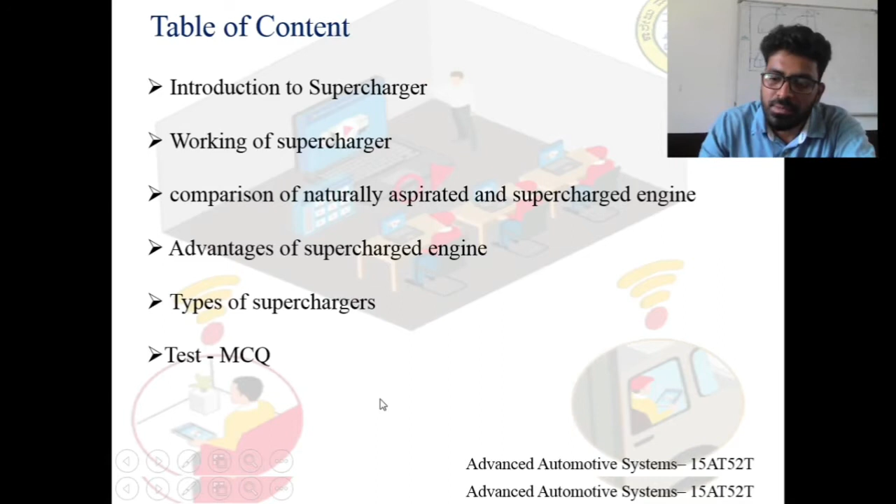Introduction: what is a supercharger? It means the external device that compresses and pumps the air from the atmosphere to the automotive engine. It is called a supercharger. We may call it a compressor or a supercharger. It will suck the air from the atmosphere, compress and pressurize the air, and send it to the inlet manifold of the engine. So it is called a supercharger.

And how is it different from naturally aspirated engines? Naturally aspirated engines means, as I already told, the engine piston during the intake stroke has to suck the air from the atmosphere. During the intake stroke, vacuum is created in the inlet manifold and the engine needs some power to suck the air from the atmosphere. So some power will be lost during sucking the air from the atmosphere. So it is called naturally aspirated engines.

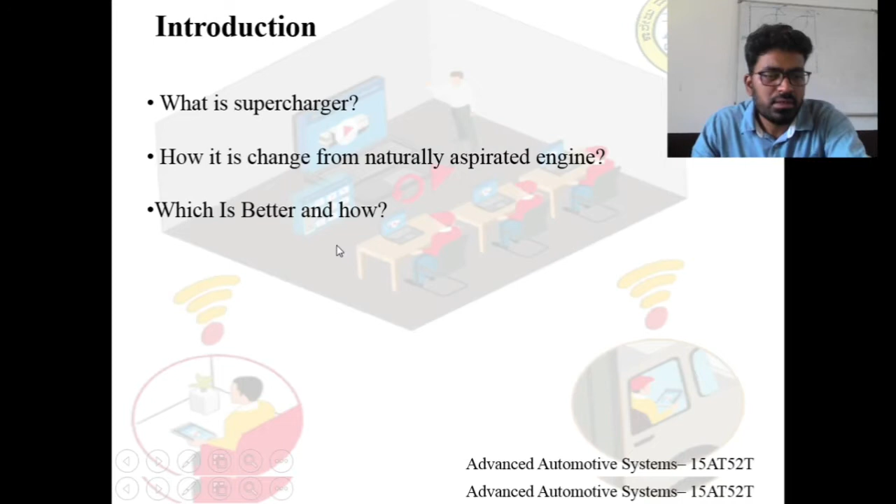Supercharged engine means the air is sucked, compressed, pressurized and sent to the inlet manifold by an external source, meaning an external compressor or device. That device is called a supercharger. And which is better, naturally aspirated engines or supercharged engines? Supercharged engines are better, and how, we are going to learn in this session. So next, working of superchargers.

Here you can see the block diagram of the supercharged engine. The engine has the exhaust manifold here and the inlet manifold, which is shown in blue color. The inlet manifold is connected to the compressor, which we call the supercharger. The compressor or supercharger will suck fresh air from the atmosphere, then compress and pressurize it and send it to the inlet manifold. So the inlet manifold will not be filled with vacuum; it is filled with pressurized fresh air, so during the intake stroke the engine has no work to suck the air from the atmosphere, because the pressurized air is in the inlet manifold.

So for the piston, there will be no work to suck the air from the atmosphere. So power loss during the suction stroke will be reduced. Now the compressor will suck the air from the atmosphere, compress it and send it to the inlet manifold. This compressor is driven by the engine crankshaft. The engine crankshaft gives the power to run the compressor so that it can suck the air from the atmosphere, compress and pressurize it to the inlet manifold.

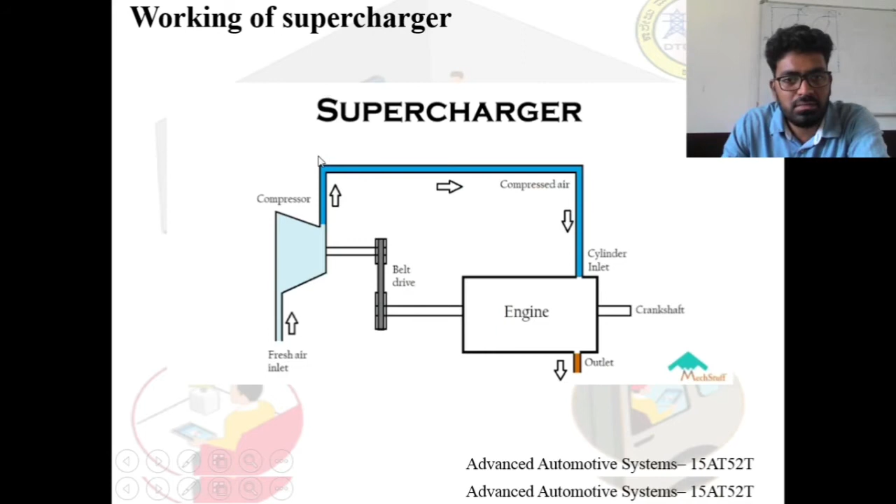So one drawback of the supercharger is that the power for the compressor is taken from the engine. The engine has to lose some power to compress the air. This is one drawback of supercharged engines. Moreover, there are more advantages as the pressurized air comes from the inlet manifold. The engine will have more volumetric efficiency and more power output, so when compared to naturally aspirated engines, supercharged engines are better.

Before the air comes to the compressor, it will pass through the air filter, and the fresh and clean air will go to the supercharger. The supercharger's work is to compress and pressurize the fresh air and send it to the inlet manifold. So the engine will have more volumetric efficiency, meaning the pressurized air will enter into the combustion chamber.

So volumetric efficiency means: suppose a single engine cylinder has 100 cc of space. The compressor can fill about 150 or 160 cc of air into the 100 cc combustion chamber. So the volumetric efficiency will be more, about 150% or 160%. 150% volumetric efficiency can be obtained by this supercharged engine.

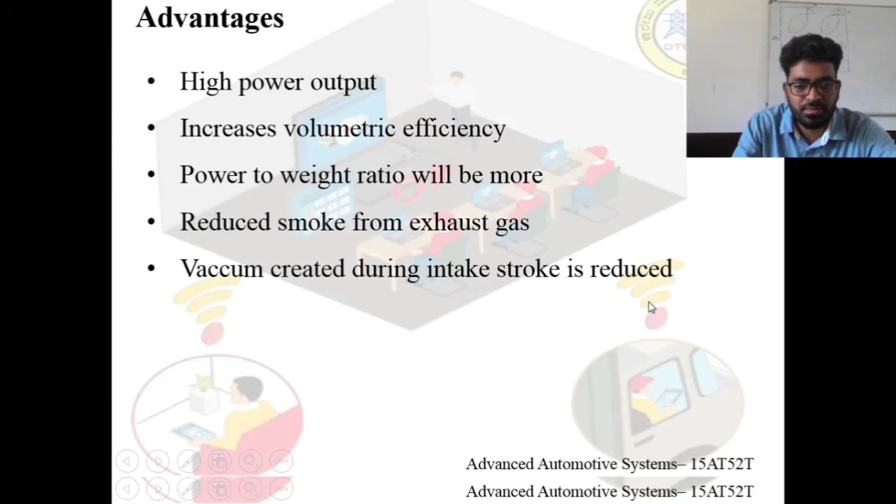Next, types of superchargers, based on positive displacement pump and dynamic compressor. Positive displacement pumps are root blower type and sliding vane type, and dynamic compressors are centrifugal type pump and multiaxial type pump. Some other types also exist, but this is enough for your syllabus.

The main difference between displacement pumps and dynamic compressors: positive displacement pumps provide a constant pressure that will pump the air or fluid to a constant level. At any speed, it will maintain some constant pressure. Whereas in dynamic compressors, like a centrifugal pump or multiaxial type pump, at low speeds they will not maintain constant pressure.

At high speed it may compress and pressurize the air or fluid, but at low speed, the dynamic compressors may fail to compress the fluid. So the main difference is that the positive displacement pump will maintain a constant pressure at any speed, even at low speed. But in dynamic compressors, at low speed they may not compress the fluid. That is the main difference.

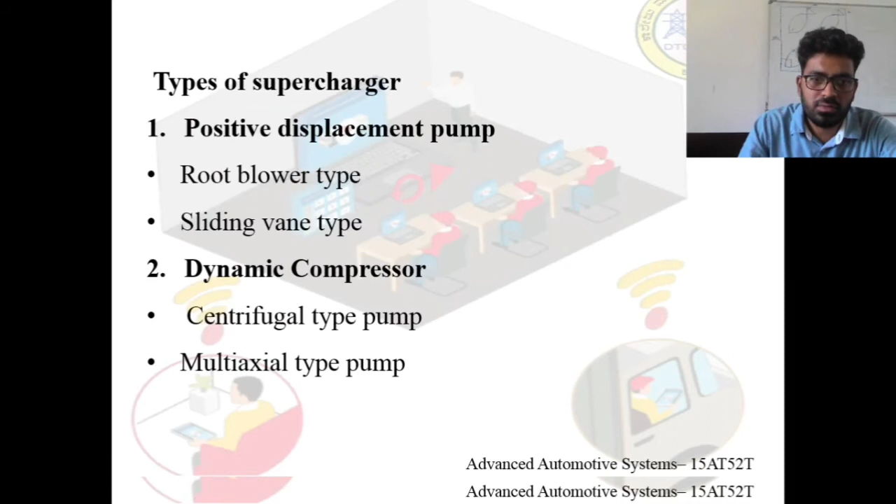Root blower type and sliding vane type are positive displacement pumps. They are nothing but superchargers - root blower type superchargers or sliding vane type superchargers. A supercharger is nothing but a compressor. You can see it here - this may be a root blower type, a sliding vane type, a centrifugal type, or a multiaxial type. Now let's see one by one.

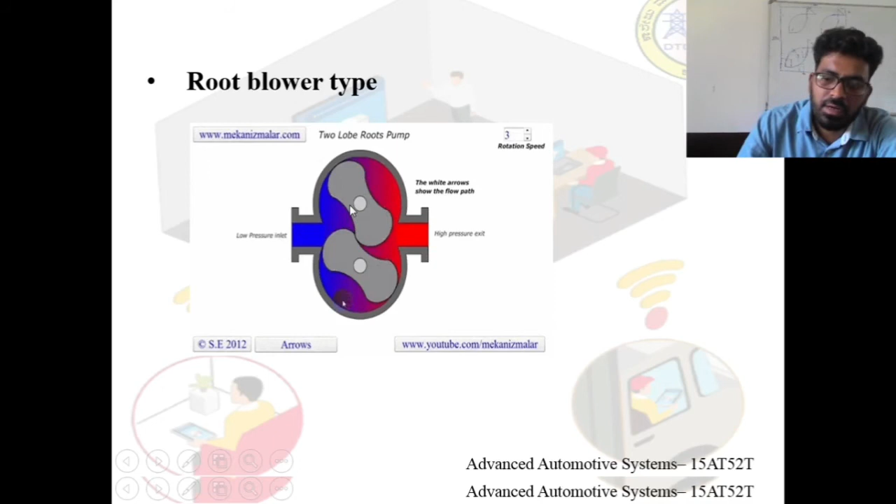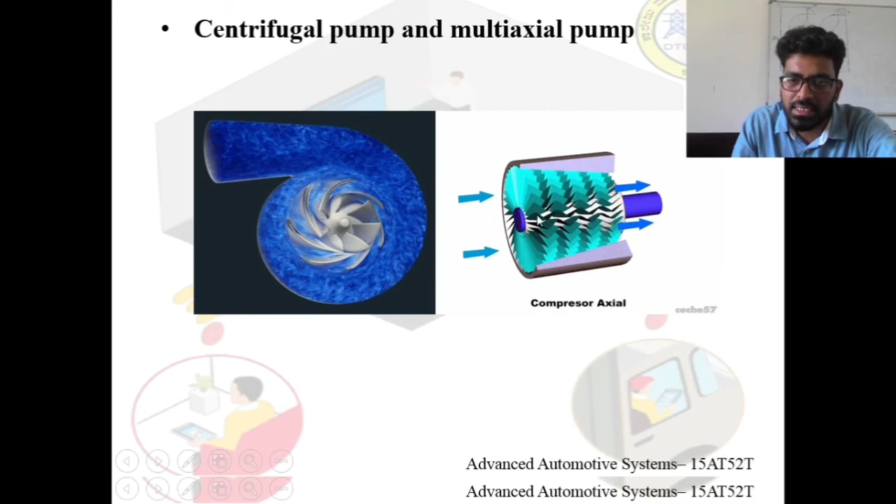Finally, some simple multiple choice questions. Firstly: by using superchargers, we can increase volumetric efficiency — true or false? Yes, this is the main thing about superchargers; we can increase the volumetric efficiency of the engine. So the answer is true.

Next: can superchargers be used for only gasoline engines, only diesel engines, or both? Gasoline engine simply means petrol engine, and we know we can use superchargers for both gasoline and diesel engines. Nowadays diesel engines are provided with turbochargers instead of superchargers, because turbochargers have more advantages — as I mentioned, they don't take power from the engine; the waste exhaust gas force is used to compress the fresh air.

So nowadays turbochargers are mostly provided in diesel engines, but the answer to this question is both — we can use superchargers for both gasoline and diesel engines. So the answer is C. But nowadays they are using turbochargers for diesel engines.

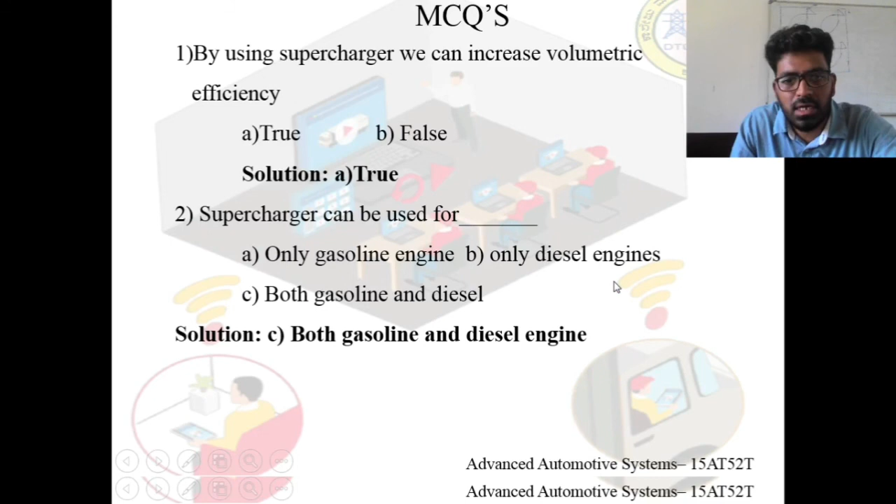Supercharger pumps use engine power to compress the air — true or false? Yes, obviously engine power is taken to run the superchargers. True. In supercharged engines, the compressor is mounted between the air filter and what?

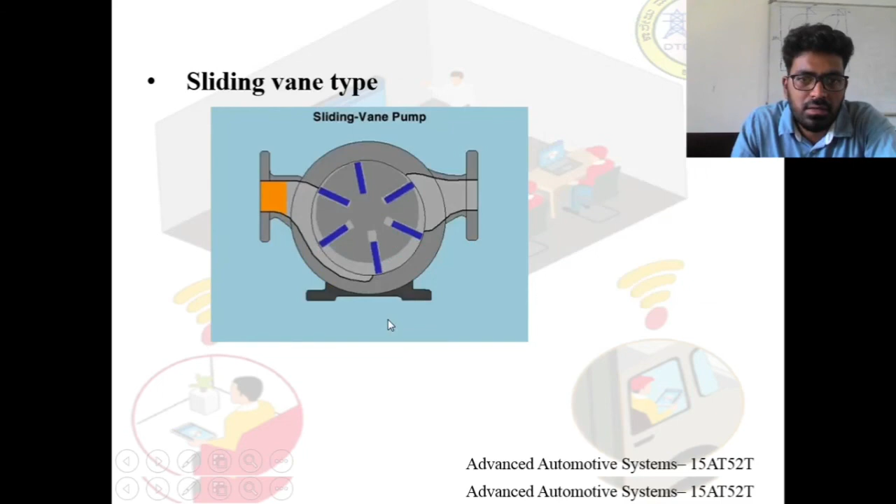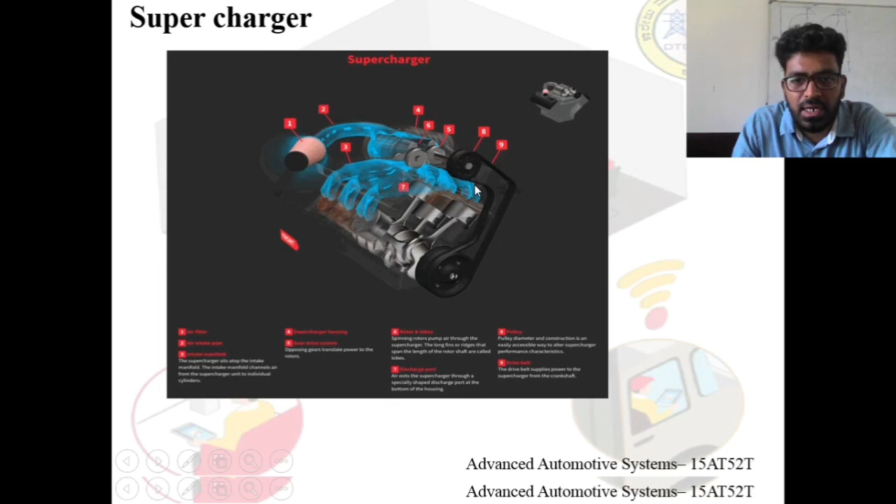Options: fuel filter, intake manifold, exhaust manifold, oil filter. As you can see in this diagram, the compressor is mounted between the air filter and the inlet manifold — not the fuel filter, not the oil filter, not the exhaust manifold. It is the intake manifold. That's the answer.

Which one of the following sentences is wrong? Supercharged engines have high volumetric efficiency — yes, correct, this is right. Supercharged engines have more power output — yes, this is also true.

Supercharged engines do not use engine power to compress the air — no, this is false; they do use engine power to compress the air. Supercharged engines have more power-to-weight ratio — yes, this is also right. So the wrong sentence is that supercharged engines do not use engine power to compress the air. The answer is C.

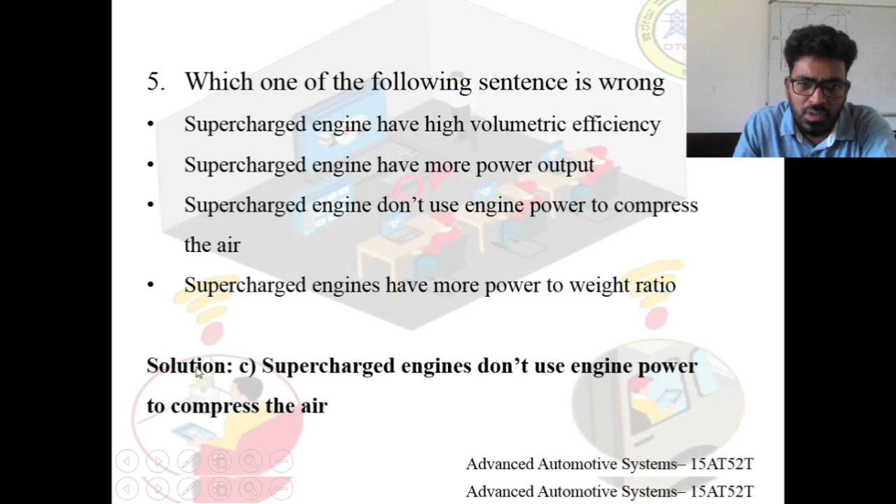Finally, if you have more doubts on this session, you can refer to Automobile Engineering Volume 2 by Kirpal Singh and IC Engines by Mathur and Sharma. These two textbooks have a detailed view of superchargers, and you can also go through the net.